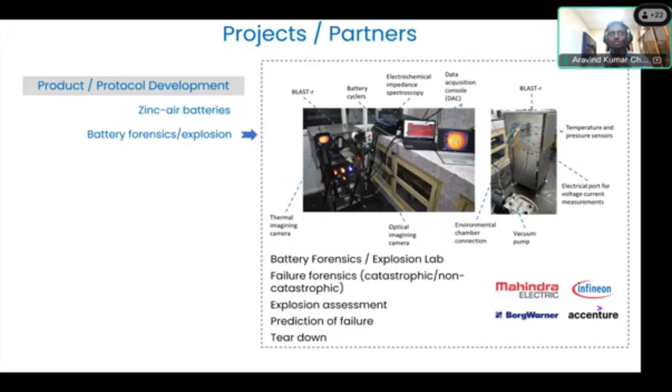And in terms of battery safety, a lot of four-wheeler electric vehicle companies have worked with us in understanding what causes lithium-ion battery fires and lithium-ion battery safety. In fact, we developed full-fledged explosion rigs to literally mimic the use of lithium-ion cells in real life, push them to the limits and understand the explosion properties. We have India's most sophisticated battery forensics and explosion lab, and we work with almost all the major four-wheeler OEMs in understanding the batteries that are going into their vehicles.

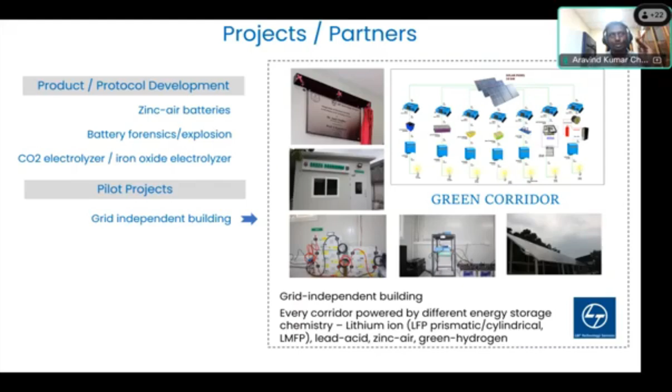And we also work on the electrolysis product, essentially iron oxide electrolysis, which is one portion of the iron air batteries team. So that is something that we work on. I talked about microgrids. This is this building, which is running on both lithium-ion batteries as well as on the hydrogen side. So there is another microgrid.

By the way, IIT Madras has 3 campuses in Tamil Nadu. One is the Adyar campus, which we all know. The second is 35 kilometers south of this campus, a 220 acre campus with 160 acres of usable land for labs, where large pilot projects go. The third one is in Auroville, interfacing Tamil Nadu and Pondicherry. So in that second campus, we have built a half a megawatt hydrogen microgrid.

Although I talked about hydrogen, it also has a battery component associated with it. This entire setup is to mimic the future of India's grid activity.

And yes, sir. Don't worry. Yeah. So I'll continue now.

So essentially we bring the entire future of India's grid into the lab. That's why we don't work on a tabletop; rather, we worked on a half a megawatt hydrogen microgrid. This is a combination of gas turbine, battery, fuel cells, everything. So it's a very customized product that we have developed, and it is under testing. We built it in partnership with Yokogawa for their requirements.

So literally, for India's future grid, anything that grid schedulers put in, and then the power dispatchers have to dispatch the power, we can do the entire thing, whatever the grid is doing, in our lab here. That is what we have built. This is fully operational now in our other campus. Essentially, its role is how to manage the energy between the generation and the utilization side.

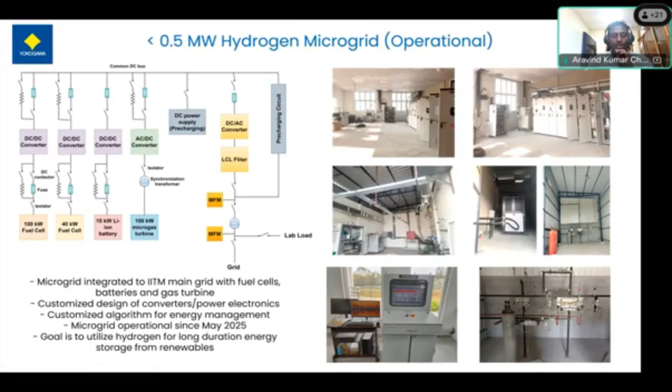And that is something neatly highlighted by Sahi Saab as well as Sondi sir: there's a disparity between what we generate and the consumption that leads to all sorts of problems. There was also a problem raised that because of this, we had to curtail a lot of power. So to understand all these things in the laboratory, we built this very customized microgrid for R&D purposes, but at a megawatt scale.

Now, I'll go to the actual problem, sun and wind intermittency. I think there was a discussion about storing for hours, right? And there is a problem that we have to store it even for months, because of seasonal variations. We just need a simple understanding, even an academic type look.

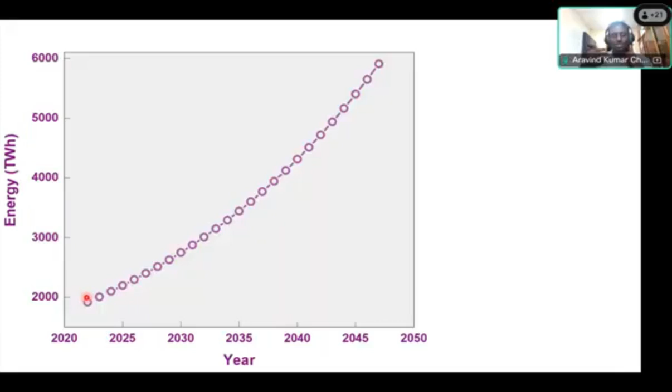Today we are consuming around 2,000 terawatt hours in total as electricity, including all forms of energy that are converted into electricity. And of course, we've taken some projections, either from VTI or others, and we saw there is around a 4.5% average increase over the next 25 years.

And that leads to around 6,000 terawatt hour requirement. And India has, on another side, an ambition of converting literally all the electricity from fossil to renewables, even assuming that by 2047, which I personally believe is an important year, 100 years from our independence. If we generate, let's say, 3,000 terawatt hour by renewables, we have taken a very, very modest number, considering the 6,000 terawatt hour requirement.

Even if we go for half direct use, essentially, while it is generating, we use, we have to store half of it. The requirement comes to around 4.1 terawatt hour by 2047. This is humongous. We are talking about a significantly large number. Essentially, the world has to make batteries if we just rely on batteries for this whole thing.

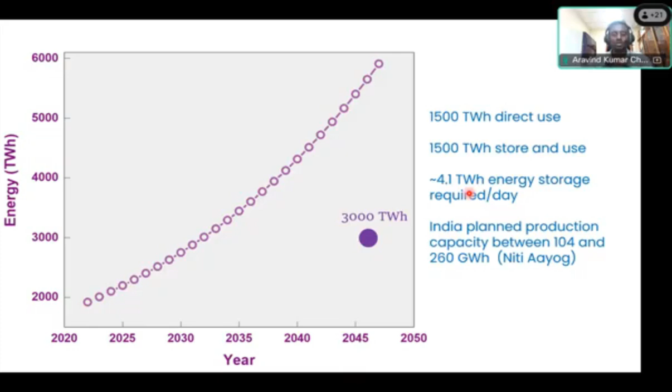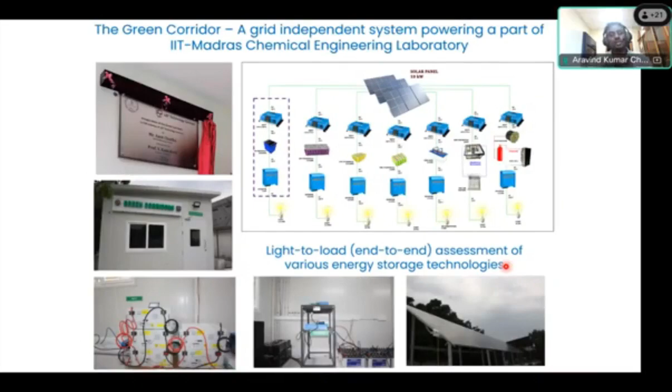So I'm going to set a context on this. I lived through this entire issue since this building is powered by microgrids. I'm going to show some set of data and then come to the metal air component. So this is one corridor's data of our microgrid, in June 2024. Our requirement is around 15 to 20 kilowatt hour per day for that corridor. And you could see the generation is somewhere around 15 to 20. And the blue one that you could see is stored and used.

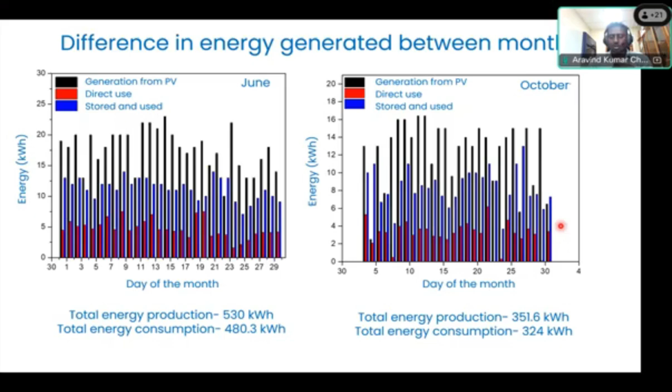During the daytime, all the red lines that you could see are the direct use component in the month of June, all the way from day 1 to day 30. So we were roughly consuming around 5 kilowatt hour directly, and around 10 to 12 kilowatt hour stored and used for the night time. Now, when I went from June to October, what happened in my microgrid is essentially the average generation came down. You could see the peak is around 16 instead of 20 or 25, like in June.

And especially I want to point your attention to these last 3 days in October, which I zoomed in here. It was complete cloud cover. And I had to shut the building power down for the specific corridor, in fact the entire building, and connect it to the main supply, because my battery in the microgrid is designed for 18 hours maximum storage, and it cannot work beyond that. It's a microgrid. It's not connected to the institute supply; I can switch over between the two, but not use both of them in parallel.

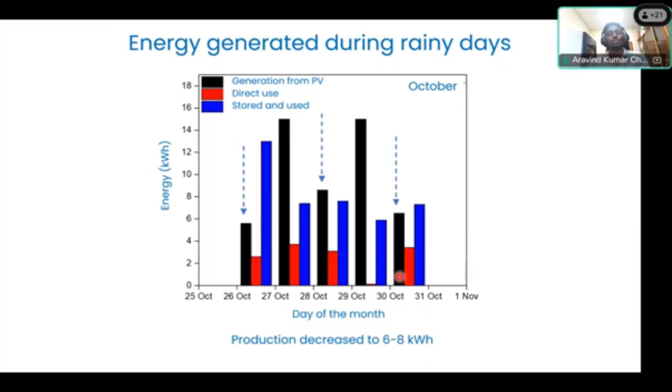So this really made us realize, we did a lot of analysis, and we found out there is a huge curtailment happening between summer and winter season. In the months of April, May, June, we are curtailing around 20% of energy in our microgrid, whereas in winter season, we are in deficit of energy by more than 20-30%. That really led us to serious thinking. India will eventually face this problem, and so we really ought to look at long duration energy storage. That's where all these technologies, metal air, hydrogen, everything, come into play.

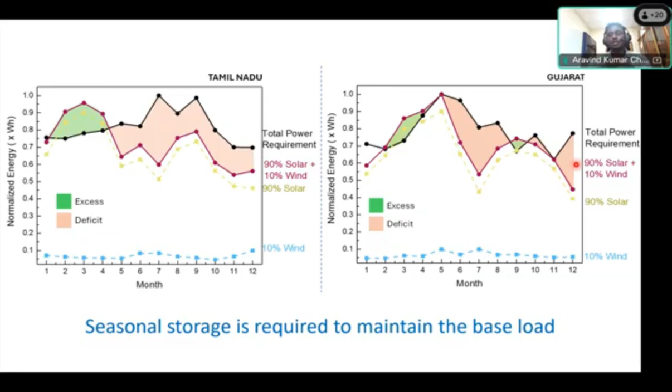in certain months. This really leads to the fundamental problem of seasonal storage, which we really are not looking at as of now, which ideally has to be taken as a serious problem statement, especially from the academic side. We have to really see what's coming 5 to 10 years down the line.

So within a day, we saw that duck issue that's coming in, and depending on how we use it, some states have a lower consumption during midday, some have almost flat consumption during the day, right? So assuming lower consumption during the day, and the sun is generating quite a lot, we need to really store all that energy within the day as well, and that's where this entire duck story is coming in.

And we also strongly believe this entire intra-day storage and inter-day storage, essentially seasonal, requires multiple options. One is obviously hydrogen. Second is solids, which typically we don't talk about, but I'll be talking about it today. India is not at all talking about it, but I think this is the biggest asset we have that we really have to work on. Batteries, obvious. Pumped hydro, which is very important, and molten salt. We also talked about storing in the form of thermal energy, which Sonde sir mentioned.

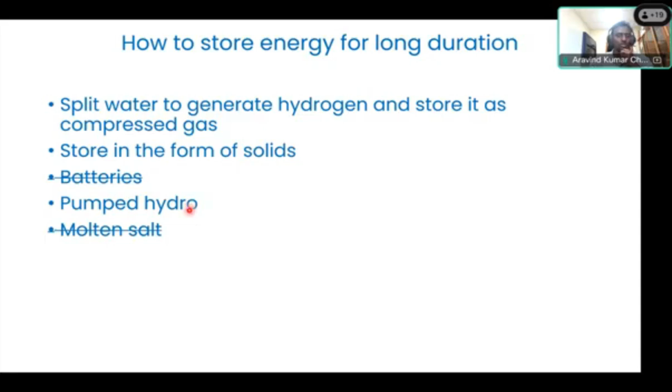Especially when you want to go for long duration, I'm going to literally remove these two and use only the three options. When I say long duration, my terminology is several days to several weeks to several months. So that's where all these new things come in. I want to give a comparison. We all talk about, will hydrogen go? Will any other metals go? Now I'm going to give a comparison.

Typically, if you want to generate 1 kg of hydrogen, it consumes somewhere around 55 kilowatt hour. And when I burn that hydrogen, I'll get 17 kilowatt hour. So turnaround efficiency is 30%. This is a point that Sonde sir has brought up also. Aluminum, when we convert to aluminum oxide, then from bauxite back to aluminum, it's a huge energy conversion. So turnaround efficiency is very important: what I'm putting in and what I'm getting back. So hydrogen with today's technology gives around 30%, right?

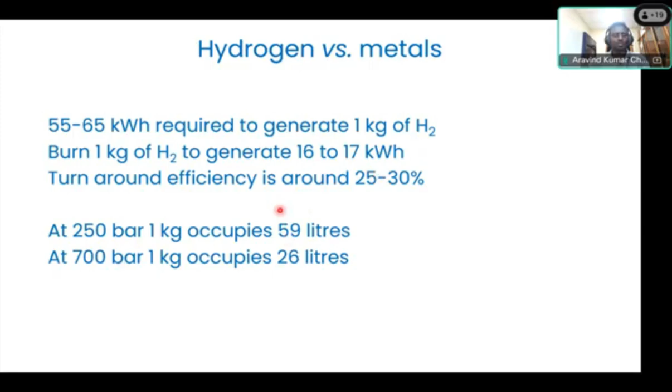So I use some numbers: in 59 liters, I can store 1 kg of hydrogen at 250 bar. Assume I use the same 59 liters, how much energy can I store, assuming certain numbers. So zinc, for example, if I take a zinc bar and store 59 liters of zinc, I'll have an energy of roughly 379 kilowatt hour, assuming a turnaround efficiency of 40%. If it is iron, we can get around 501 kilowatt hour, which is quite high. Aluminum is even higher, 712.

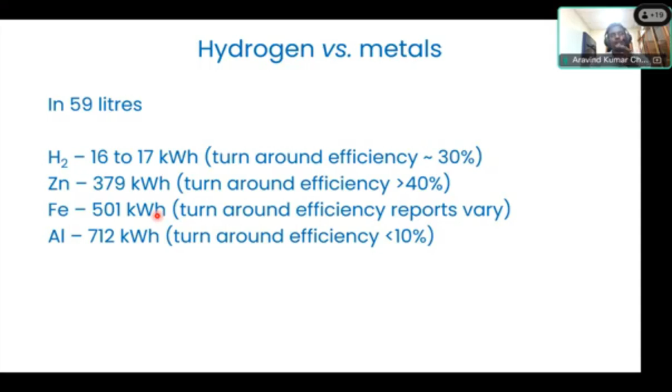But I would also like to bring your attention to some numbers written right here. When I convert zinc oxide to zinc, and then burn the zinc and get the energy back, I'll only get 40% of the energy. Whereas with aluminum, it's less than 10%, so obviously it's not interesting. Iron ore is at a very nascent stage to really come to this number. My numbers vary between 5 and 20%, depending on the research article, not on pilot products. So that is where iron stands today. But should we finalize only one thing right away? The answer is definitely no.

Zinc, India is the 4th largest producer. Iron, 4th largest producer. Aluminum, 2nd largest producer. I personally believe all these three need to be really considered as a form of energy storage for terawatt hours, because they are easy to transport. Hydrogen is required in certain portions, but there is always a worry about what portion of this long duration energy can go into hydrogen. A small portion of it, definitely 5% or 10%.

But there is also something we should really look at: the cost of transporting hydrogen, which is always a question people bring to us. That's where we say the usage point of these metals should be separate, and the regeneration point, converting the spent metal oxide back to metal, should be some other point where renewable is in excess, and we can just transport the metal bars as we like.

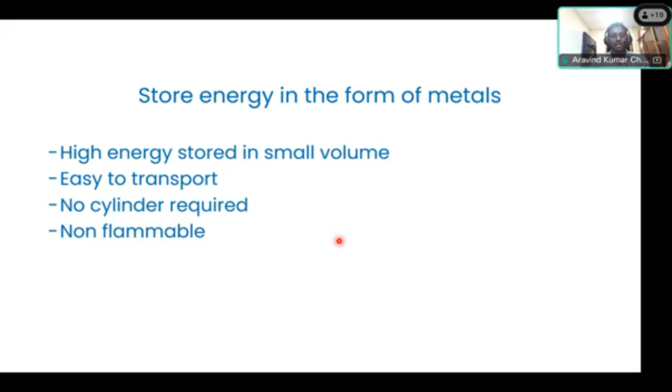So what we come out with is, let's say I have a metal air battery right here. Any metal, either it can be zinc or aluminum or iron. I discharge it here. I generate, let's say, iron oxide or aluminum oxide or whatever. I'm taking it to a separate location. Essentially, it's about shuttling the discharge product.

Wherever there is a renewable excess, we can literally convert them back to the metallic state using those excess renewables. It can be done locally, or it can be done across the country, depending on where we want to really do this regeneration. This concept is fairly old.

It's like a 1960s concept, but for Western countries, it might not be applicable. For India, this is a very nice thing that we should really step onto, considering the problem of long duration energy storage and the solutions that we have today. There is no other option apart from hydrogen that we can use today. Even assuming that 25 to 30% of that requirement is taken care of by hydrogen, we have to really look into storing energy like 50 to 70% using metals.

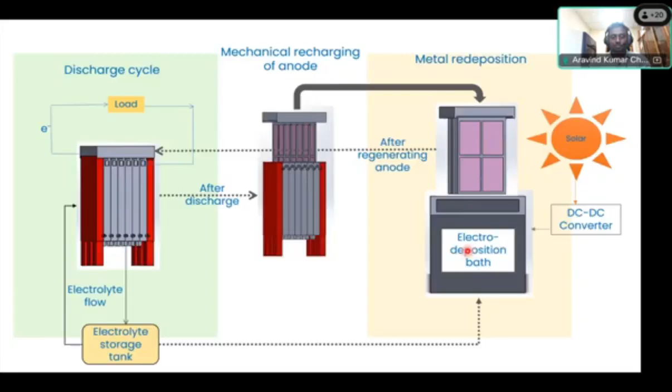I think this audience is such an elite audience. This might look a bit simple, but as an academic, I admire one thing. India has done something very, very significant in its own strengths. Let me start with UPI. No other country in the world is as strong as UPI. I personally believe we did not follow any Western country in this aspect. We believed UPI is good for India, and we did it.

So too in the space mission. India is really good. Of course, that is in line with the rest of the world. Although we had failures, now we are at a great success, with the Pragyan rover or Vikram lander, whatever we have sent. Can we bring this dominance in energy storage in the form of solids is what I personally would like to see. I'd like to just give some comparative numbers, delegates.

So if I take zinc air, today, let's say the charging efficiency for all three types of metal air batteries, either zinc or aluminum or iron, is around 70 to 95%; the best batteries can have close to 95 and above. So it's really a good thing. It's almost working close to lithium-ion when it was at the development stage. Discharging Faraday efficiency is also very good, except for iron air today because of a lot of parasitic reactions.

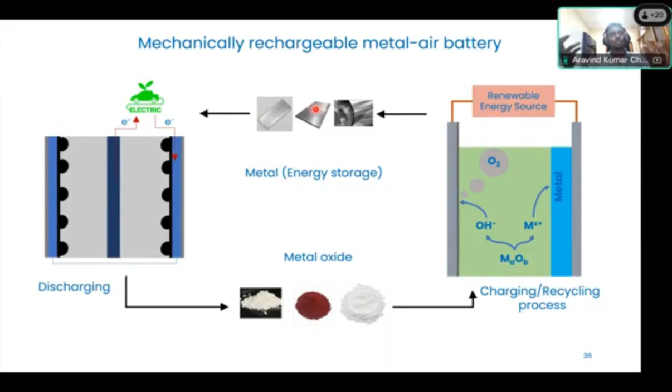So essentially these are all metal oxides after discharge. Metal oxides can be converted back to metal by using excess renewable energy, which helps us avoid curtailment. This is a simple concept of bifurcating, or deconvoluting, the generation from the utilization side. It's almost like hydrogen systems, where water and H2 are the two major sources. Here I'm talking about metal and metal oxide, which is analogous to the electrolyzer and fuel cell scenario in the hydrogen system.

In fact, we also have a company out of it - these are three of my PhD students. We have a company just 30 kilometers from here, a place called Ambattur in Chennai. The company's name is Sthyr Energy. Our guys are making a 150 kilowatt hour battery module, which will be up by the end of this month or early June. So this company is working on storing energy in the form of zinc, which came out from our lab and the technology we developed there.

Last year they attracted $1 million investment. Now they are getting into much more than that, a second round of investment coming in after they have shown a scaled-up product. This one uses almost all components from India - literally close to 100% of the components coming from India here. I would probably stay around 95%; 5% is coming from elsewhere because of supply chain issues. But it's not that the rest 5 cannot be made in India - it can definitely be made in India.

But I would also like to caution that this technology is still developing. Lithium-ion batteries, when they were in whatever they were in the early 2000s - that's where we are with zinc air battery. Now we need another 5 years to really mature this technology. We also believe a lot of other players, industries as well as academics, have to work on this technology so that we develop it well, because one institute, one lab, one company cannot really bring a fantastic product. I think a lot of people have to work on it.

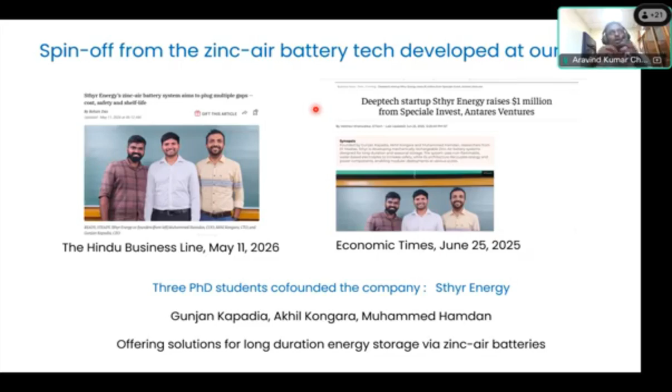If there is an opportunity, any company doesn't have to work with us. They can work with any institute in the country. But if they could solve some of the core challenges, we can discuss and try to figure out what are the core challenges we are facing in these technologies. And if anyone could solve this problem, we would be very happy, because at the end, we have to win. Staying alone will not bring a solution is something we strongly believe in, which was also emphasized by Sahi Saab and Sonde sir in their talks. So we want to work with people, bring a lot of experts together to really solve this problem. Even if they win, that's a win for us as well, right?

In fact, we have a nice project with Baker Hughes, and we made a large device. When I say large, it's not at industry scale - for academics, it's slightly large. It's around 100 centimeters square active area. We made it at a very low temperature - when I say low temperature for iron, it is 99 degrees Celsius. We converted the entire iron ore to pure elemental iron with 99.99% purity.

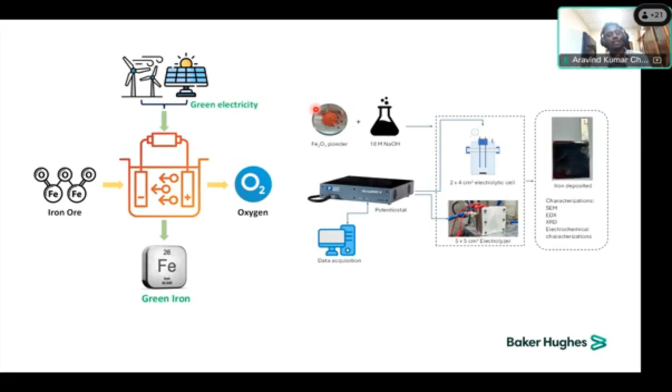So we are working on that regeneration portion of it - meaning the concept of generating the metal in one place and utilizing the metal in another place is going to be the future of the entire green electricity storage, to avoid curtailment. And that's where I'm going to end with saying: green metals - why only hydrogen has to be green? Why not metals? That's one of the thoughts we brought up from our lab, and definitely that's what we would like to bring in. Honestly, if someone asked me which one is going to be the winner today, zinc is definitely mature. But I personally believe we should also explore iron and aluminum. And in the periodic table, there are a lot more elements you could consider.

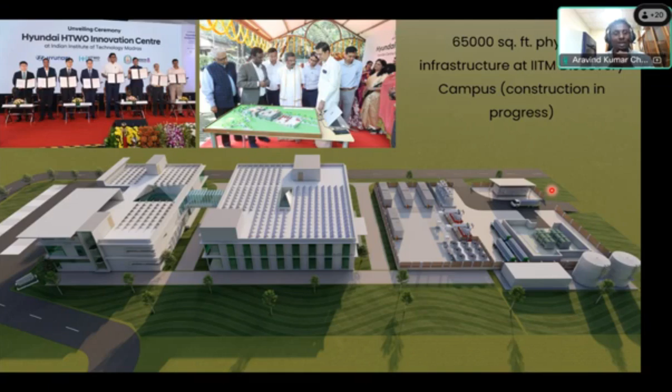I would love to invite all the esteemed delegates here. I'll get the contact details from Bajaj Sab, and then I'll share the invite. We would love to have you for our center's opening, and possibly contributing to some of the biggest R&D activities. Thank you so much for your time listening to me. Please apologize if I've taken more time than given. Satish sir, back to you. Thank you very much for the opportunity.

Thank you very much, Professor Arvind Kumarji. It has been a really very interesting presentation. Not only iron-air, but you have covered the whole gamut of battery energy storage in different metals - aluminium, sodium, all these things - in the chemistry, whichever is available. We are really grateful to you for having given us this detailed presentation and enriched our knowledge.

With the permission of our chairman, Dr. H.L. Bajaj, may I now open the session for questions and answers. In fact, Dr. Sonde has already gone, so it's only Professor Arvind who will be answering the questions, even on behalf of Dr. Sonde, if it is there. So I open the house for the question and answer session. Thank you, Satish.